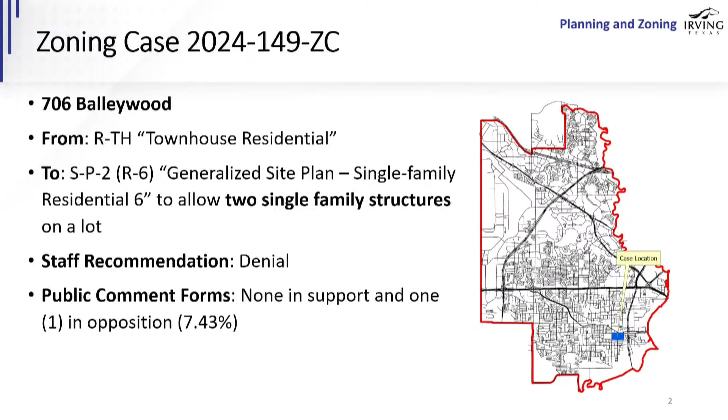Staff recommends denial, and we have seen no letters in support and one in opposition.

Here's the aerial map showing the house and the second structure, a single-family home in the back. Originally, this house was built in 1955 and has been modified over time, while the second structure was built around 2015 without permits.

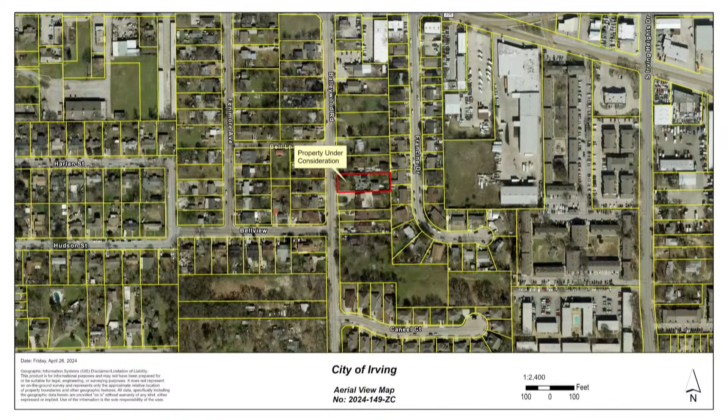It was intended to be used as a garage, but was later converted into a full living space.

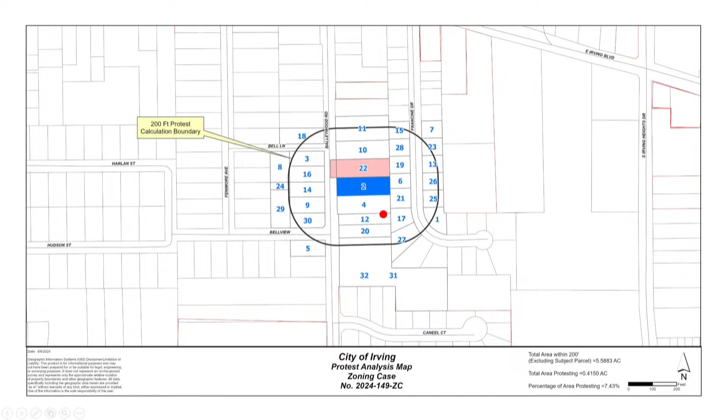Just to get some background for the structure and how it came about: around 2015, work was started for the rear unit to be a garage. Originally, the owners were required to remove the second floor as it had a loft, leaving an unfinished attic space, as the height of this structure is 19 feet.

But the owners ended up modifying it and never contacted the city for a final inspection to that change, nor did they contact the city when they turned it into a single-family home.

It was around February 28, 2024, when code enforcement spotted the structure and noticed the violation, that they had converted the rear detached garage into an additional dwelling unit.

And that is when, after seeing the change, they gave the violation for the 864 square foot structure that has 3 bedrooms, 1 bathroom, and a kitchen and living room space.

And as seen on the site plan, due to this being a single family lot and they're asking for single family zoning, it does not allow for 2 single family buildings on one platted lot. So they're asking for a variance for that.

And then also they're needing a parking variance, as the original home does allow for it to only have 1 parking space, but since this is a new structure, they need a 2-car garage and 2 off-street parking spaces, requiring 5 spaces.

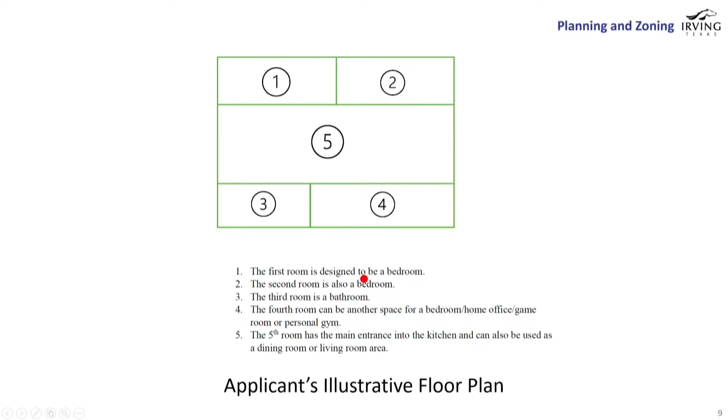And here's the floor plan showing that the first room would be designated as the bedroom, a second room, third is the bathroom, and then office space and the kitchen.

Here's the subject property showing the rear structure. Here's the second structure that was originally a garage and then converted into the single family.

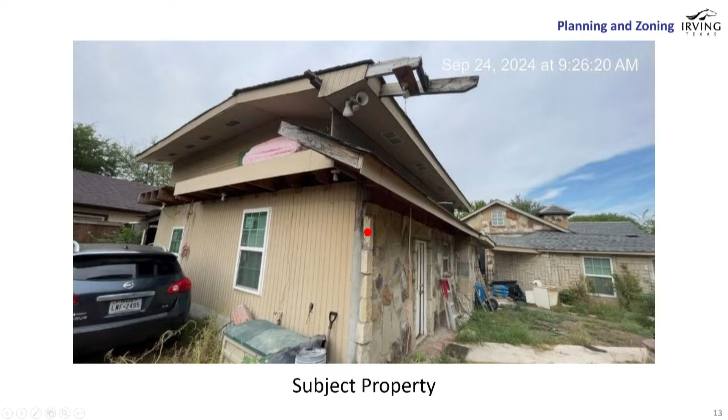water, and inspections have reviewed this case, and water did make the comment that the second unit must connect to the main home services if this does get approved, and have to go through permitting.

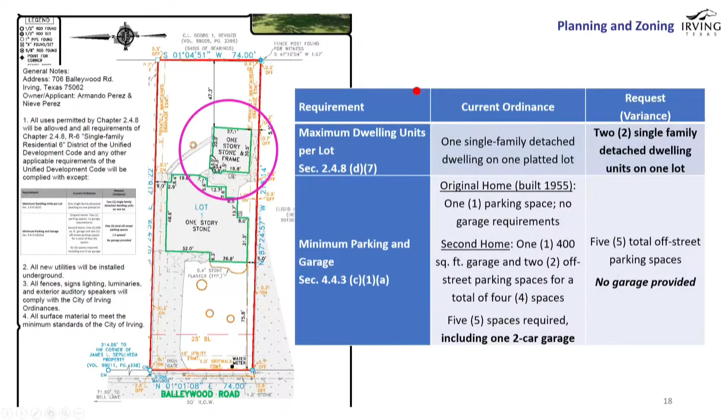But based on the configuration and it not meeting the R6 requirements, staff does recommend denial for the second dwelling unit and sees no undue hardship for the parking. And I'll be happy to answer any questions for this.

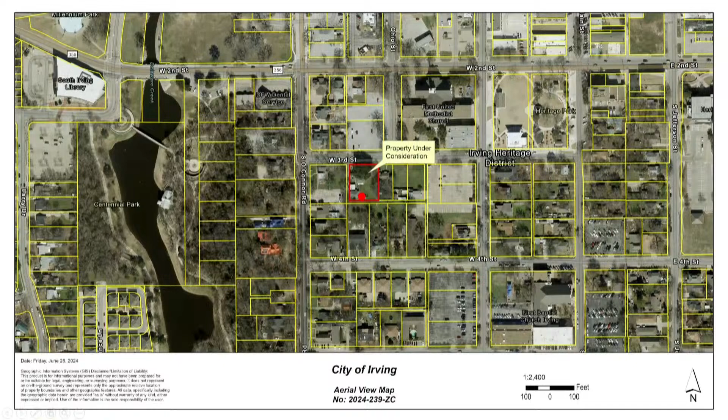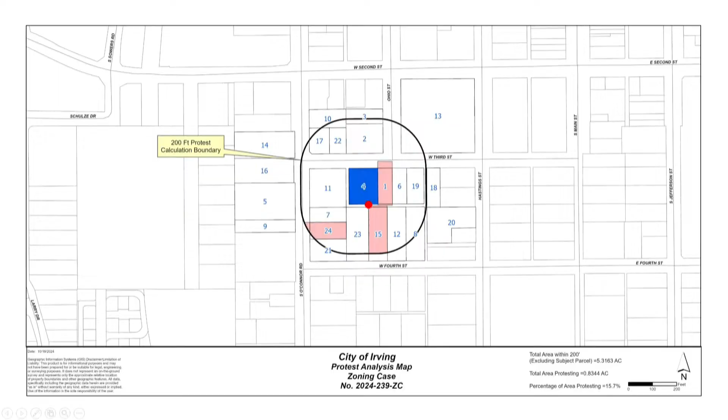Because of HCD, multiple units are allowed, but since this is not one unit looking like a single family home, they are needing a variance for it to be one single family structure plus a duplex structure, with 3 units not all being attached.

Also in HCD, parking is required to either go through the alley to the rear of the property or lead to the back through a driveway. Since this is not doing that, they need a variance to allow parking on the side. However, they are not needing a parking variance as they were in the last submittal for the last P&Z meeting.

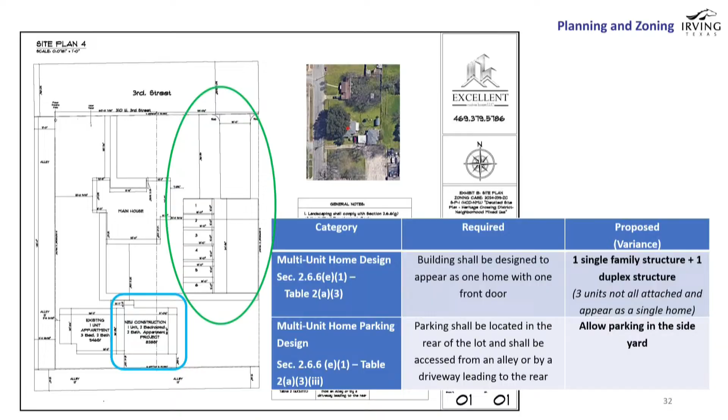Yeah, I got one question. I noticed when it was presented to us last time, they said they were going to use it for employees at the salon, et cetera, but the letter of intent says it's going to be used for long-term rental property?

Yeah, from my understanding, the long-term intent is to be able to rent it out, because I believe this existing apartment is being rented out currently, and that would be what the second unit would be used as well. But unless the owner knows something else they're more looking for, any additional information?

In my opinion, and this is just my opinion, this is just another way to do an ADU. We have been turning people down that do have hardships, who want to move their grandmothers or elderly parents into another dwelling unit on their property, and we have said no about that, but yet we're considering letting people build multiple houses on one property.

I had a question. One of the nearby residents who protested pointed out that this is in the Heritage District, and raised a question about what the purpose of that title is intended to convey. Is it intended to convey that it will maintain the sort of single-family, small-town look of that area? That seemed to conflict with what I understood to be the zoning for this property, that they are able to put duplexes, multiple units, I forget how many altogether.

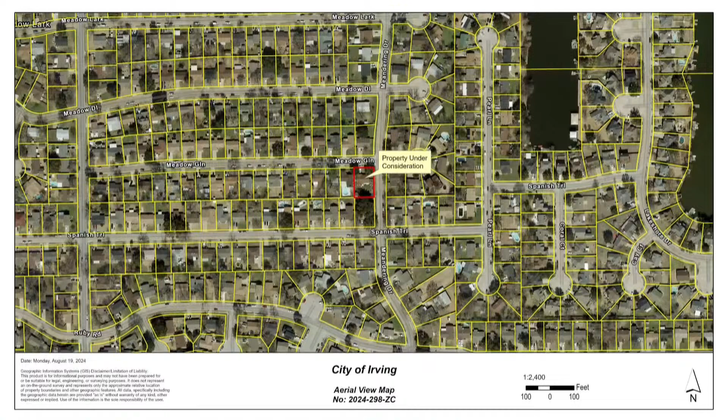This is the aerial of the property, a corner lot in a residential suburb. The future land use is traditional neighborhood, and you can see it's surrounded by R6. This is the notification map showing all the property owners that were notified. And then the site plan: they're wanting to do a 20 by 20 carport, which would create a 20-foot variance, so their front yard setback would go from 30 feet to 10 feet, with a peak elevation of 12.

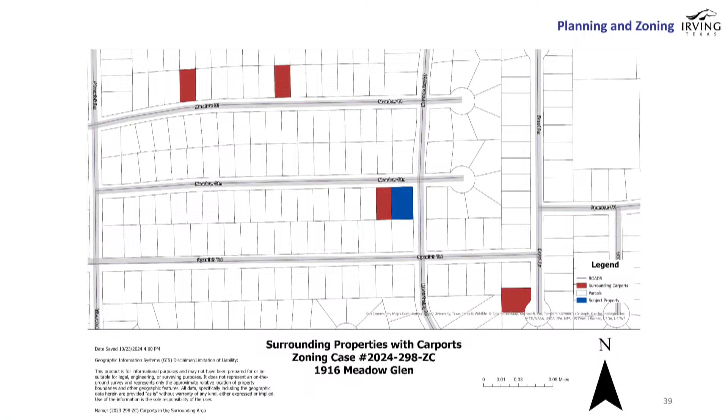This shows surrounding carports in the neighborhood. We have one built right next door, and a few over on Meadowdale and one on Pearl. This is the subject property - the west side where the neighbor already has a carport, east of the subject property, and north of the subject property. I'm open to any comments or questions.

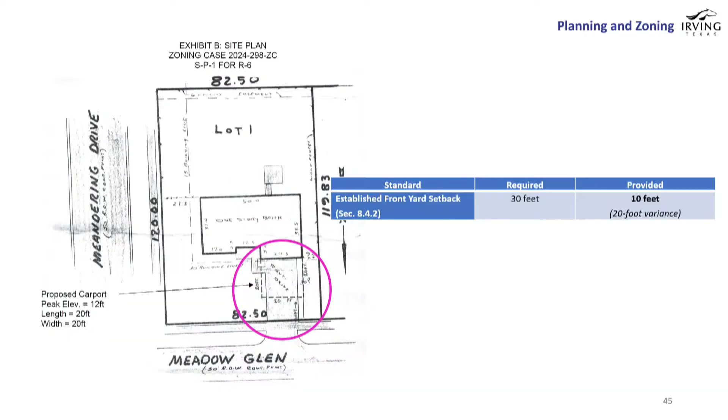That other carport next door, when was it built? I believe it was 1999... let's see, 1993. So it's old, but it was done with a permit. It was done with a permit? Yes. Okay, all right.

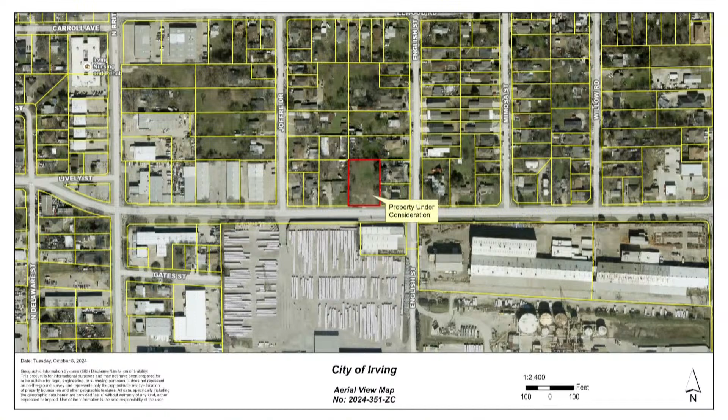So this is the aerial of the property. Future land use is traditional neighborhood. And then you can see the zoning - most of it is R6. You do have ML20 just south of them, so they're kind of neighbors across the street. And then you have CC going further west.

This is the property owners that were notified. And then this is a visual of what we did for the calculations.

So the numbers blocked in blue, that is the lot area. After taking the lot area from all those and averaging it, that's where you get that 16,379 square feet. If you get to the 80%, which is the minimum that they would have to do, it'd be 13,103 square feet.

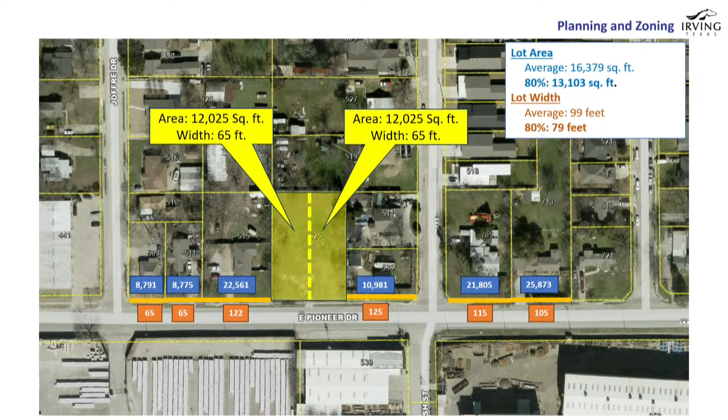And then same with the orange blocks, it's the lot width, so we took that average, ended up being 99 feet. With the 80%, it'd be the minimum 79.

For their site plan - oh, I just wanted to mention, that slide you had just before was great. I really like all the numbers on that, it's very helpful for seeing the comparative sizes. Just wanted to mention that in case I forget. Okay, yeah, I believe Kim put that together, so it was done really nicely.

And so this is the site plan. What they're proposing is going to be bigger than what the R6 standard would be, but it is smaller than what is required by that transitional lot compatibility. So for the lot width, instead of the 79 that is required, they're requesting 65. And for the lot area, instead of that 13,103 square feet, they're wanting to do 12,025 square feet.

So this is the subject property. This is the east, their neighbor. West of subject, their other neighbor. And then this is the ML20 I was talking about, that's across the street. Open to any comments or questions.

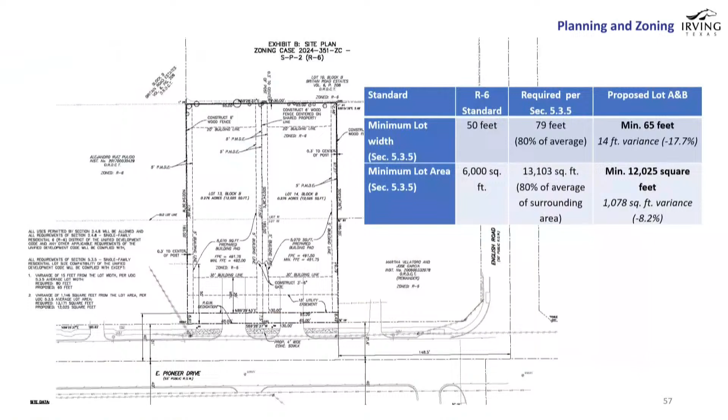This property here, the one on the back, Elwood Street, runs parallel with Pioneer. We just approved one at the last meeting, and council approved dropping the lot size down to 51, 52 feet I think it was. I really don't see an issue with the 65, dividing it up. I'm very familiar with this lot.

I just don't know about having cars backing out like that. I think it's going to be a real big hazard. The day I drove down through there, there were 18 tractor trailers lined up on that road, coming in or going out, covering up every one of those houses.

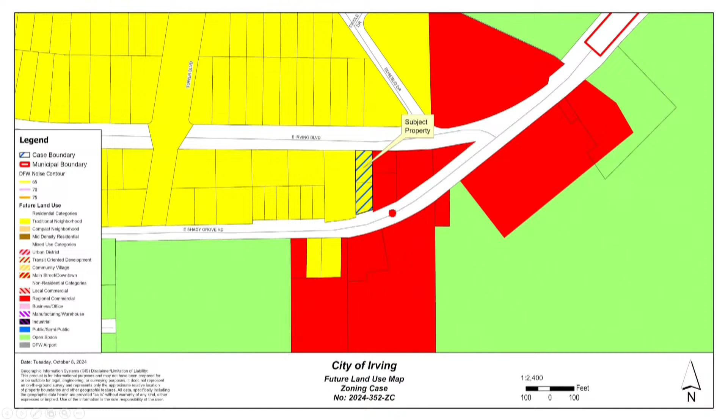Here's the aerial map again showing the single-family home and the vacant lot. Here's the future land use. And here's the zoning, and I want to go into a little bit of history about the zoning to understand how it kind of got here.

This property was annexed around 1951, which had a local business zoning similar to the surrounding area. Then the industrial zoning came in around 1974 and 1987. During that time in 1987, they allowed for the ML20 light industrial use, but also including single-family uses. As you can see with this site plan, it shows here—this was the site plan approved in 1987.

It allowed residential or commercial use on either lot. Based on this, there were conditions including no parking in the rear, and no requirements for adjacent commercial properties to provide screening, since it did have a light industrial and single family detailed site plan. The applicant wants to do something different than what was approved by the site plan, and that's why you're seeing the case today in the rezoning to commercial warehouse.

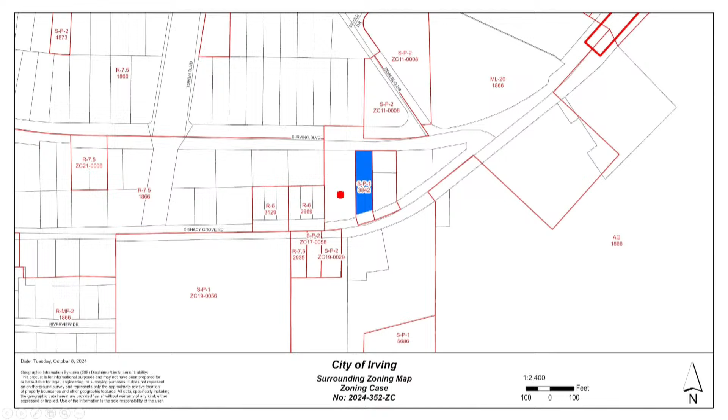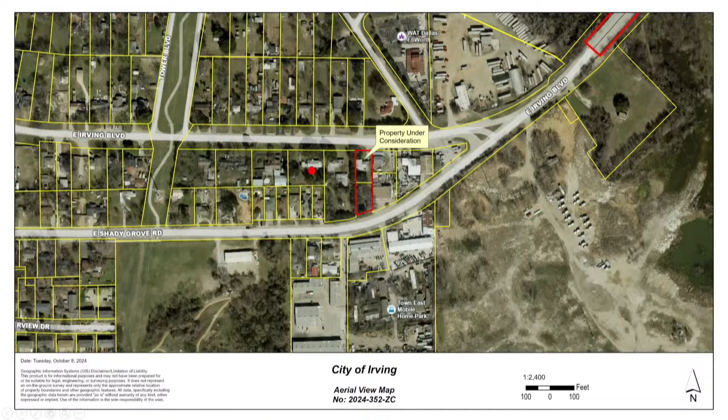Based on the adjacent properties to the west, these are all zoned R6. This property is zoned ML20, and the properties to the east are also ML20. So to the east is more of a light industrial area, but everything to the west is residential, and this property, even though it's zoned ML20, is a residential property. The only commercial is east and south of the property; everything west and north is residential, with a church on the corner.

Here's the subject property. To the east is the residential property, to the west is another residential property, and then north.

Based on the comprehensive plan amendment, staff cannot support this case, going from traditional neighborhood to manufacturing warehouse, as we do not feel it is compatible with the surrounding area. I'll be happy to answer any questions on this.

Any questions? I have a question for staff. Jocelyn, I know you weren't around in 1987, you were still a very young man, but based on what you know, ML20 uses were pretty common go-to zoning back in the day, weren't they?

Yeah, they were. This was actually originally Zone G, local business, under the old 209 zoning ordinance. Then in 1966, it was changed to ML20. The current site plan was approved basically in 1974, which recodified the existing ML20 for some reason, and then the current site plan was approved.

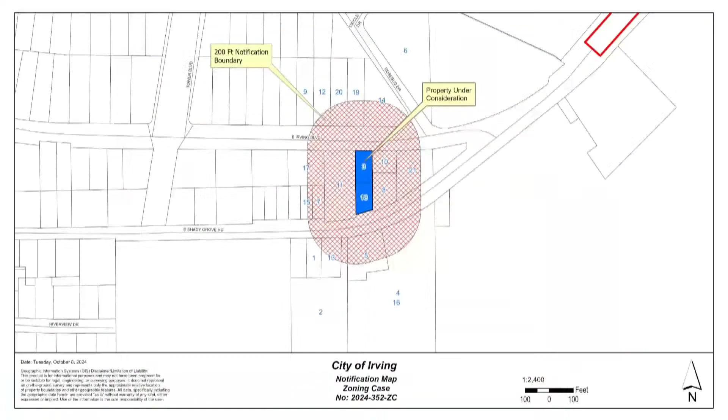And what about the house to the east? So this current house, they would be able to change it to ML20 if that was the light industrial use they wanted, but they would have to go through the process, depending on what they want to do.

It looked like they had a lot of cars on the back, like out of a store, just when I stopped by there. I don't know if that's actually residential or commercial, I actually don't know. Yeah, that's a good question. It could be. It looks most likely commercial, but it could be residential as well.

Also, I think according to their letter, they're proposing their egress to be from Shady Grove. I was just there, and I don't think that's the best spot for it, honestly. The traffic was coming fast down the curve, and I had trouble parking over there. But at the same time, looking at this, their neighbors can put a warehouse if they wanted to, pretty much that's what I'm understanding right now. So to tell them no, I don't know. I believe I don't like warehouses, industrial uses without a buffer zone or anything, but this is unique. Those are my thoughts on this.

Jace, do you want to show the property to the west one more time? Yeah, looks like there are some active permits, very recent ones pulled last week, for sewer main replacement, roof replacement, and a couple other things. So that's what they're doing on that property. Any building permits? No, just permits for sewer main replacement and re-roof. Meaning like to build a new structure? No, but they're replacing apparently about 200 feet of sewer main.

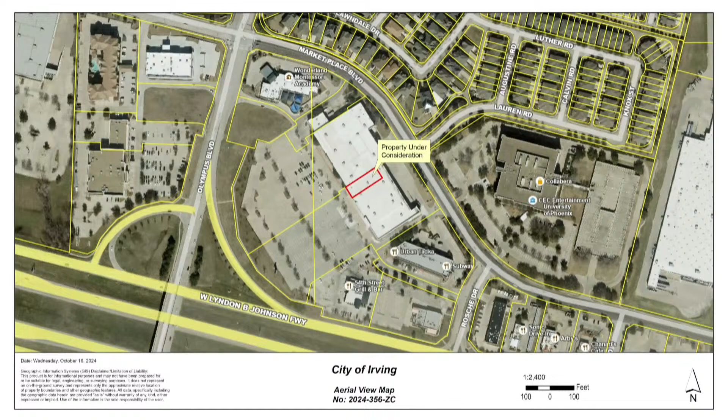So the next zoning case is 2024-356-ZC at 1900 Marketplace Boulevard, Suite 110. It is currently zoned SP2CC for generalized site plan community commercial, and the applicant is rezoning to SP1 RAB, detailed site plan restaurant with the tenant accessory use of the sale of alcohol beverages for on-premise consumption. Staff does recommend approval, and we have seen no letters in support or in opposition. Here is the aerial map showing the suite in red, a 7,472 square foot lease space in the Hunter Plaza Shopping Center. Currently this suite is unoccupied, and the proposed tenant is going to be Mandira and Masala Bar and Restaurant, with KNSA Foods and Retail space currently.

Here's the future land use map, the surrounding zoning map, and as you can see there's a couple SP1 RABs in the area, the proposed notification boundary, and here is the site plan showing the suite again. A restaurant is defined as a public space primarily serving food with permanent seating and kitchen facilities, which they plan on having. The establishment for SP1 RABs requires a minimum of 40% of sales from food or non-alcoholic beverages, and the applicant states they were able to meet those requirements. Here's the subject property where the suite intends on being, east of the subject property, one of the restaurants in the area, west of the subject property, and then the site plan.

The proposed establishment meets all the alcohol distances from religious facilities, schools, hospitals, and residences. Since the development is consistent with the comprehensive plan and requires no variances, staff can support this request, and I'm happy to answer any questions for this zoning case.

Just one question, that's what I had questions about, because of that school that's on the corner there.

What's the distance there? They gave me a distance map, and it was greater than 300 feet, since it has to go from door to door based on the road. I don't remember the exact feet, but it did meet the requirement. Thank you.

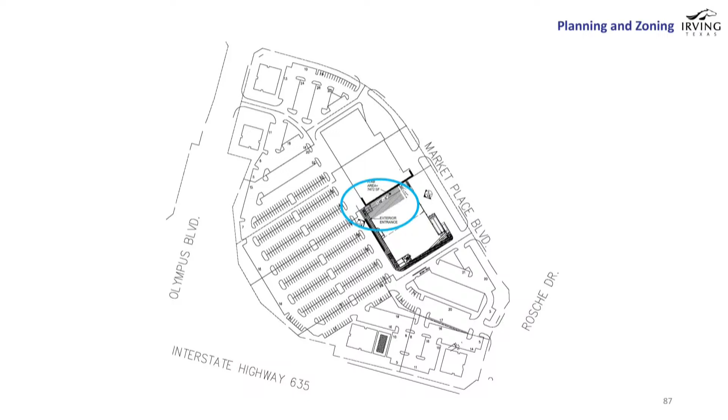Any other questions? No? All right, on to the next one. So the next zoning case I have is zoning case 2024-362-ZC.

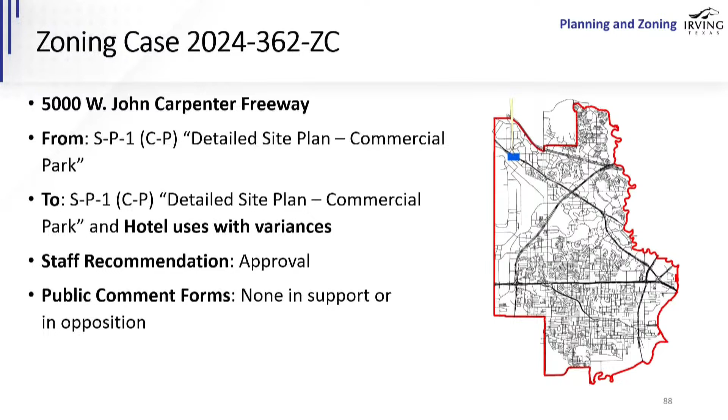At 5000 West John Carpenter Freeway, the current zoning is SP1 CP for detailed site plan commercial park, and the applicant is wanting to rezone the SP1 CP detailed site plan commercial park and hotel uses with variances. Staff does recommend approval, and we see no letters in support and in opposition.

Here's the aerial map, and to give some history on this site, it is a 1.90 acre site that was previously developed as a hotel. The hotel caught fire back in 2022 and was demolished, but it was originally built in 1997, before a lot of even the first hotel development standards in 1999 and the current ones today.

If the applicant wanted to stick to that hotel, they could build it exactly as it was before since it did get burned down, but they are wanting to do a new design with a new brand introduction and new layout.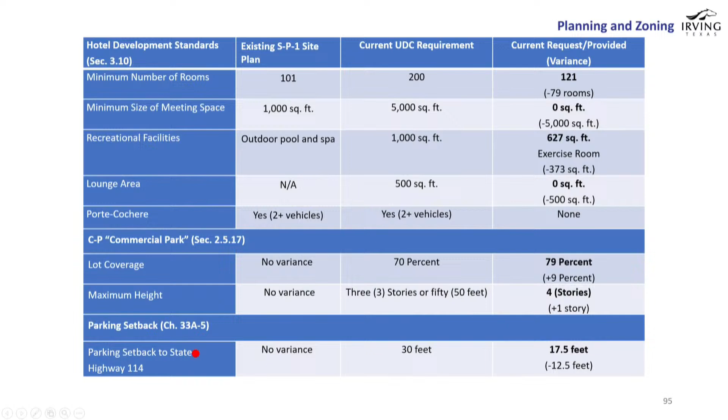The applicant did state a big reason for the variances is due to the original lot's limited expansion and the Hilton brand's new change for not including restaurants or meeting spaces. That's a big reason for the minimum size of meeting space not meeting current code, recreational facilities, lounge area. They also need a couple variances from commercial park due to lot coverage, since commercial park has a restriction of 3 stories and they're wanting to do 4 stories, plus the parking setback from State Highway 114.

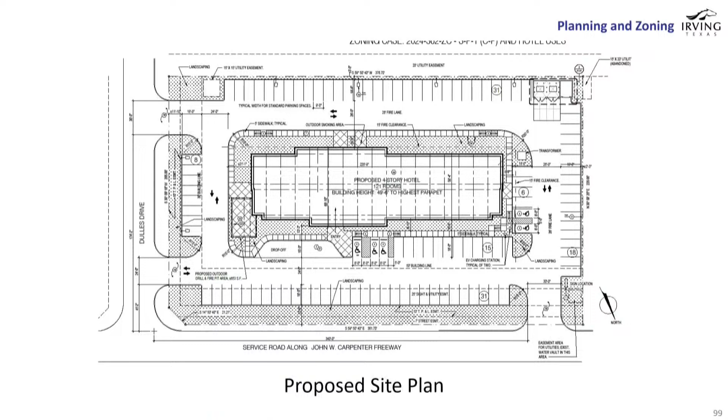Questions? I have a question. When a building is torn down, what makes this lot unique where they do not have to follow the current UDC codes, as far as the 200 units? We've had a lot of people bring forth different hotels, motels, etc., and they did not meet the 200 room requirement and ultimately did not pass. But what makes this lot here unique where they can just rebuild what they had without following the current codes?

So it's because of the detailed site plan that was approved in 1997. When something gets burned down, our legal nonconformities say, especially since this is a detailed site plan, that it has to adhere back to exactly how it was. So since this got burned down, they could build it exactly how it was before and not have to adhere to the current requirements because of the detailed site plan—they weren't under the current codes. But they are wanting to do something different, so that's why you're seeing it today.

So they could do just 100 rooms then? Mm-hmm. Yeah, everything in this first column they could do right now and wouldn't have to come through P&Z or council.

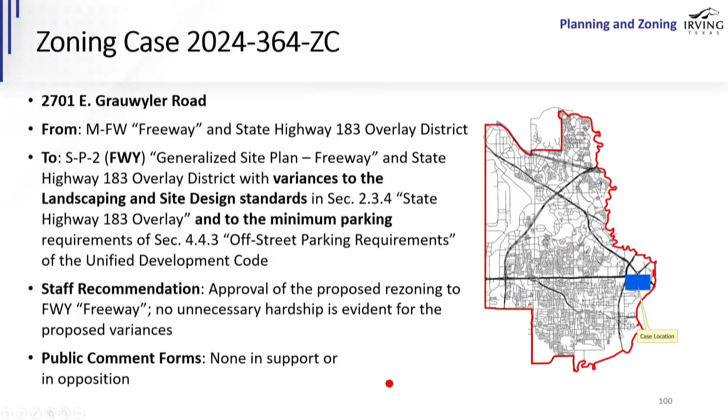The staff recommendation is approval of the proposed rezoning to freeway. However, finding of no unnecessary hardship that was evident for the proposed variances. Public comment forms, we did not receive any in support or in opposition.

This is an aerial of the subject property. If you'll just kind of keep in mind, there are 3 existing buildings and that large parking area on the west side. You'll see how that will change when we get to the proposed site plan.

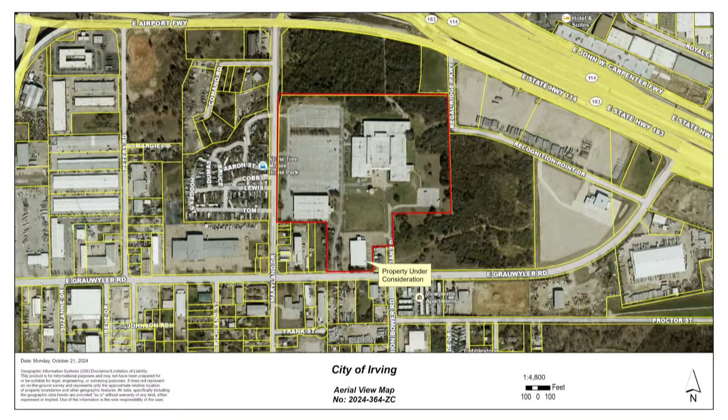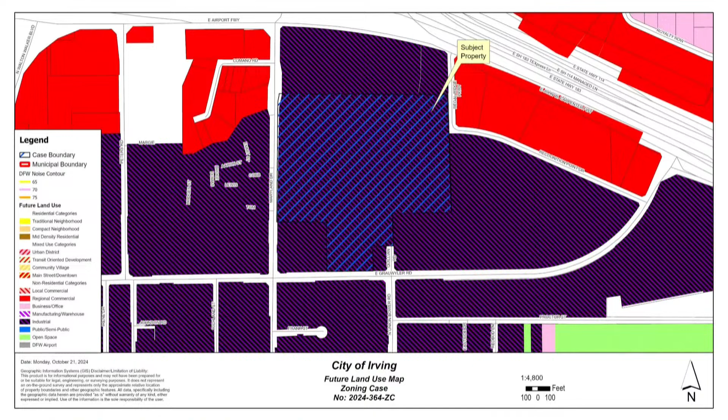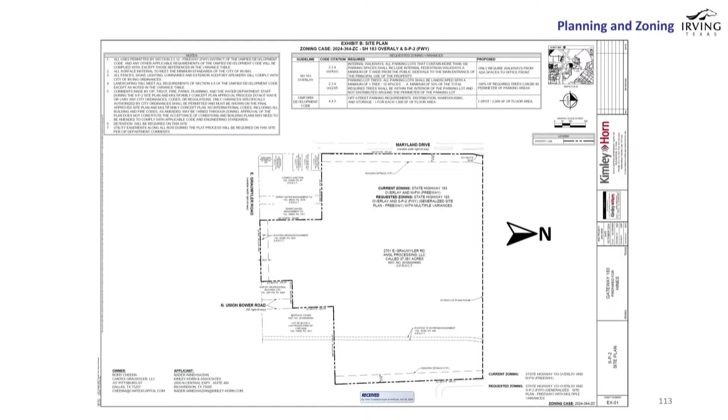Staff does take the position that since the requested zoning is consistent with the comprehensive plan and the use allowed is one of the uses, and the use is allowed in the existing MFW district by right, staff does support the rezoning request to freeway. Staff does not find evidence of a hardship for the requested variances, therefore we are not supporting those. I am happy to take any questions or comments you have.

Can you go back to that chart with the variances they're requesting?

Which end of the building, the first one that they're wanting to not have a connection to the sidewalk, to the road, to the public sidewalk, which side of this facility is going to be the entrance?

I'm not positive, but hopefully they can answer that for you. I would imagine each building would have its own entrance, but I think the one on 183 would house the main office space, while the other buildings may be more warehouse related. I'm honestly not positive.

And then I had questions on the other two variances they were requesting. Did they give any particular reason on the other two why they felt it was necessary to have the trees on the perimeter, or why they didn't think they needed as much parking?

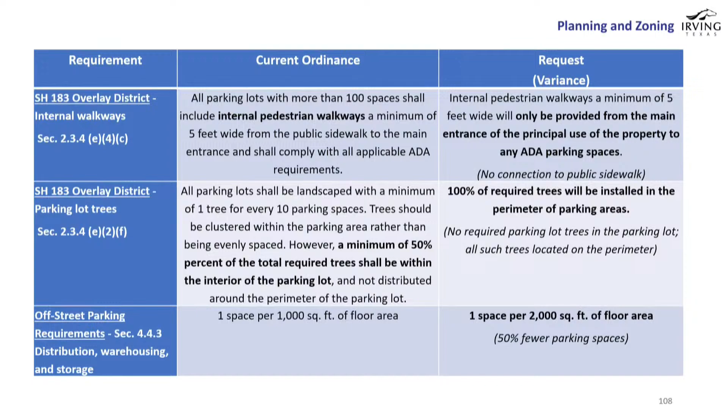We had originally included that in the staff report from their letter of intent, which was not very detailed — it was more like, we are just asking for these variances. However, I did have a lengthy phone call with the applicants last week after they saw the staff recommendation, and they did provide a lot more detail to me that I think they will convey to you tonight in their presentation as to why those variances are indeed justified, or why they feel that they're justified.

Any other questions? On some of the variances, the way the buildings lay out, from what I'm seeing, is this going to create another issue with fire and the fire hydrants and all that stuff? Are they putting all that inside the perimeter in order to?

Since it's not a detailed site plan, we are not addressing any of that at this point, but fire did have informational comments just related to the zoning case — that they would be required to meet all fire codes at the time of building permit and/or platting. So the building layout could change or be moved or twist around? This is just a concept. Correct.

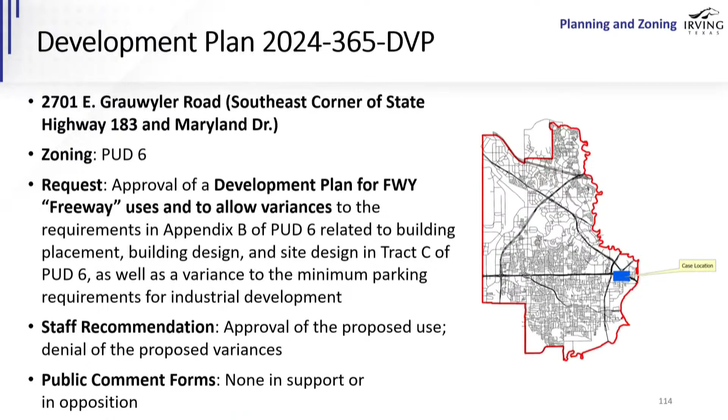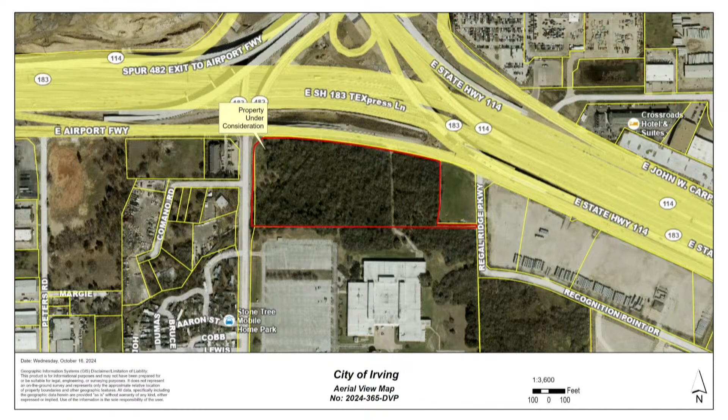As many of you may be familiar with, in any of the PUDs that we have, the planned unit developments, the way to establish the base zoning district is through a development plan. So in PUD 6 in particular, they just divide the land uses by tracts A, B, C, and D. When you look at the PUD 6 requirements for those specific tracts, it then specifies further zoning categories that would be appropriate for those particular subtracts. In this case, the property is located in subtract C, and that tract does recommend freeway, as well as ML20 and ML20A, as some of the proposed uses that would be compatible.

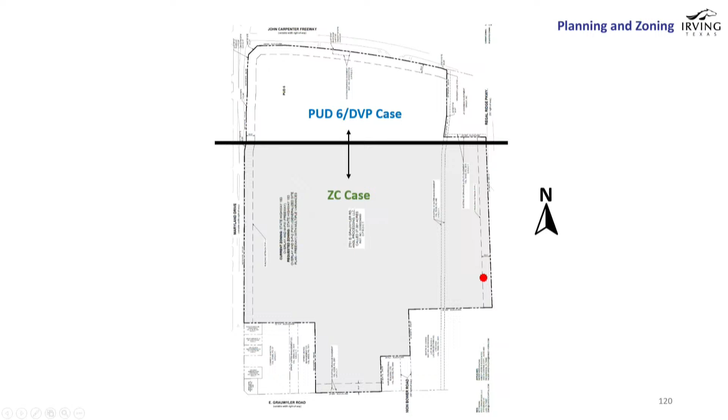And again, this is the site plan or visual that shows the parcel in relation to the property to the south. And again, the overall illustrative site plan and the summary of ordinance or of variances for this particular request.

Regarding the variances under PUD 6, they are requesting a variance to the requirement for a minimum of 50% of primary street frontage for any development, to have buildings within 60 feet of that front property line with the principal entrance located on that frontage. They are requesting instead that the building frontage can be within 150 feet of the property line.

Another variance from PUD 6 requirements is the maximum one row of parking spaces in front of a building. They are requesting at least 2 rows of parking spaces be permitted.

Another variance from PUD 6 is designated pedestrian access ways connecting the public sidewalks to the primary building entrance. That's very similar to the one for the 183 overlay. And again, they are asking for no public connection to the public sidewalks that are adjacent to the site.

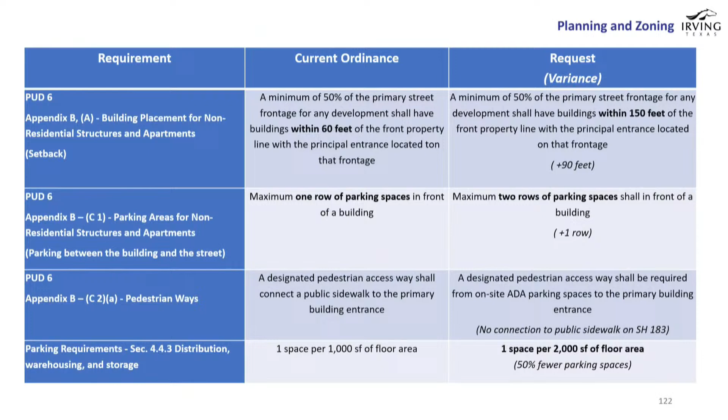And again, regarding minimum parking requirements, they are requesting 1 space per 2,000 square feet of floor area rather than 1 space per 1,000 square feet of floor area, so a 50% reduction.

And back to the site plan. Again, the staff is recommending approval of the development plan to establish freeway zoning. It is consistent with the comprehensive plan and also an allowed use within subtract C of PUD 6.

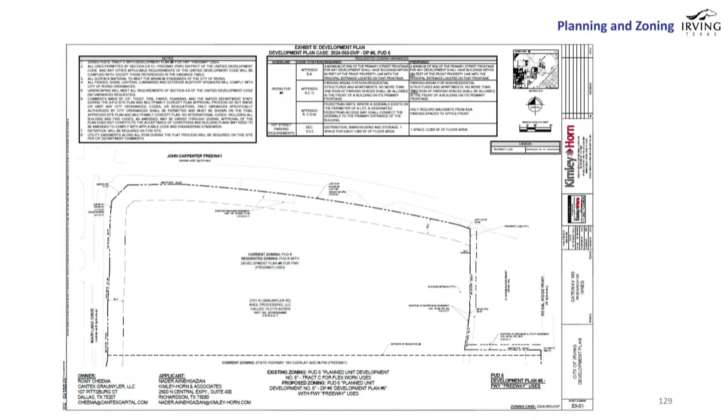We do not find that we can recommend approval of the variances to the PUD 6 standards. There was no evidence that the building must be further set back from the right-of-way that's necessary for the 2 rows of parking. Staff also does not support the variance to reduce the parking count, since the site is large and can physically accommodate the required parking.

And I'm happy to take any questions you might have. Any questions on this part of it?

Is this being built by a user that is asking for this parking because they know this is what they're going to need and use, or is this just a developer building this and trying to find tenants for the property? I am not sure if they have a specific user in mind, but you can absolutely ask them during the public hearing. They may be able to shed some light on that.

Any other questions? No? Great, thank you. I think that's our last of the public hearing items.

Next on our agenda is a report from commissioners on the APA Texas APA conference that just happened up in Allen. Who was able to attend this time?